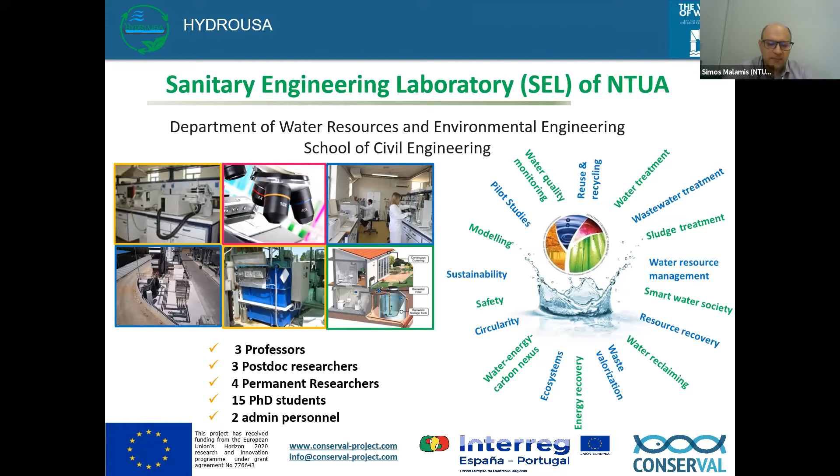I will now go into the actual presentation, the HYDROUSA project, and I have a video to share with you. It's a 3.5-minute video of the project.

Imagine a future summer day on an island, one of the hottest summers this island has ever seen. But wait, there is an oasis ahead. How is this possible? Let's see where it all started back in 2018 with HYDROUSA, an innovation action project funded by the European Union with the ambition to create regenerative and nature-based water solutions.

We are a constellation of international partners consisting of universities, research institutions, companies, NGOs, water utilities and municipalities, and we are on a mission. Let's think for a moment: the Mediterranean region faces significant challenges - dry zones, places with high touristic activity during the summer, problematic farming practices, wasted water resources. In HYDROUSA, we revolutionize the water value chain by closing the loops, and the revolution is circular.

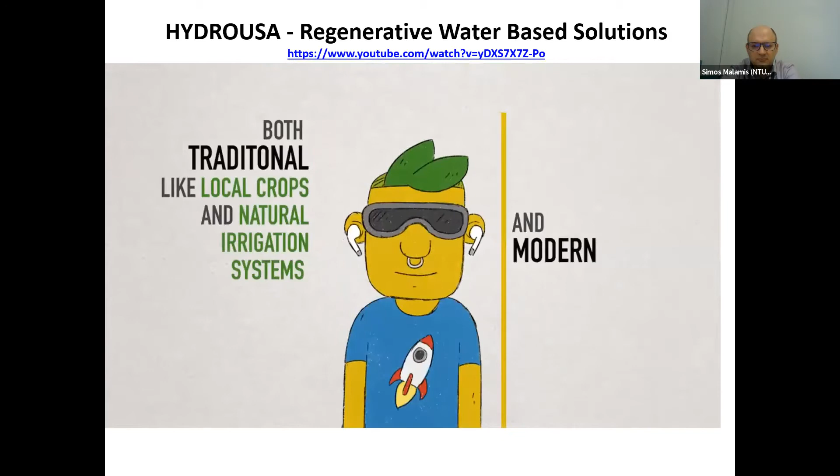We use a combination of techniques, both traditional like local crops and natural irrigation systems, and modern like ICT technology and online monitoring, mixed with biomimicry technologies - nature-inspired innovations. The journey of HYDROUSA has already started in 3 Mediterranean islands. Let's take a look at how they work.

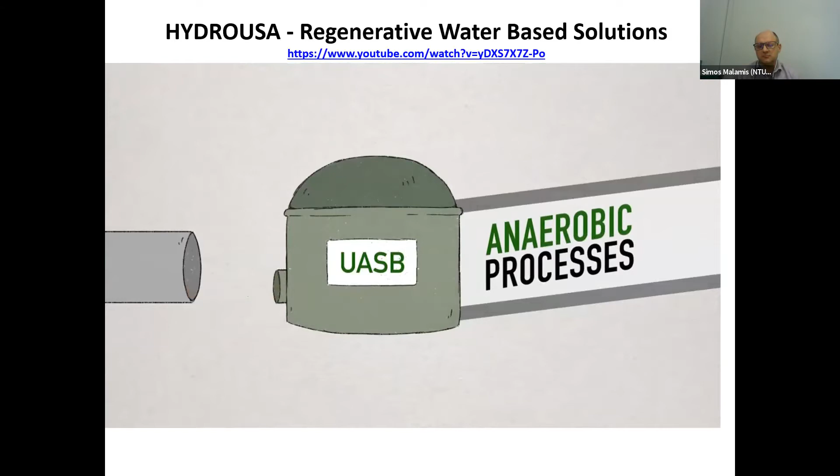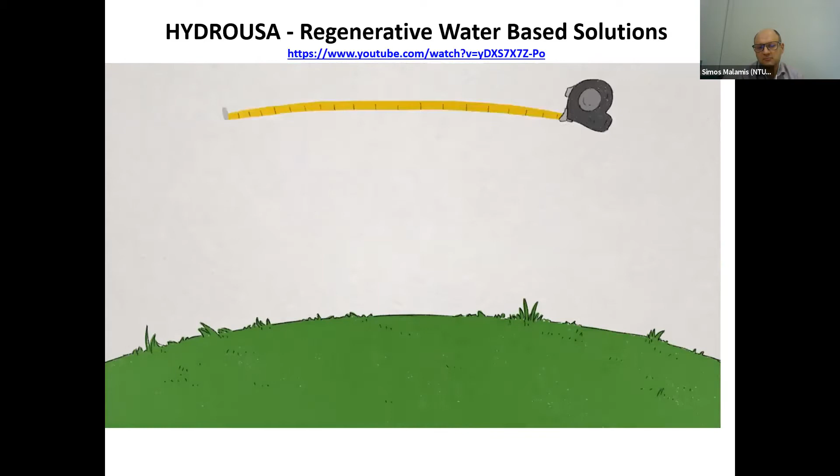On the island of Lesbos, we develop a rich agroforestry ecosystem. We treat domestic sewage by anaerobic processes coupled with constructed wetlands to produce biogas, which is upgraded to methane and used to fuel a car, sludge to be processed through an innovative compost cultivator, and treated water, free from pathogens, that will directly be used to fertigate and irrigate a 10,000 square meter field, including forestry trees, orchards, bushes and herbs.

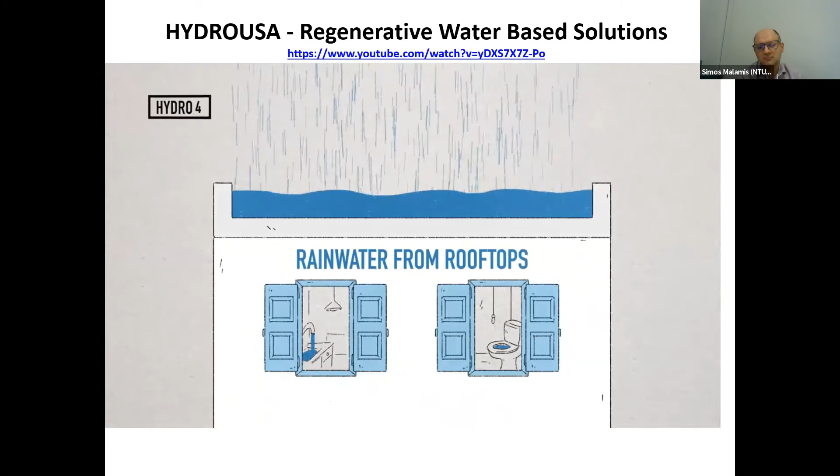On Mykonos Island, we install an innovative rainwater harvesting system on a remote dry hill to irrigate oregano and produce essential oils from it. Meanwhile, on the same island, we collect rainwater from the house rooftops to provide water for domestic use such as toilet flushing, and to recharge groundwater sources for the irrigation of a lavender field.

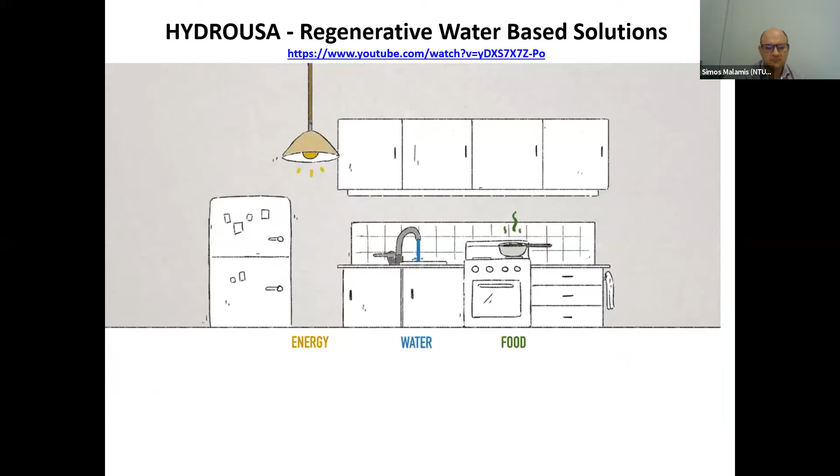Moving now to Tinos Island, we apply an innovative and nature-based desalination system that mimics the mangrove plants to produce edible salt and to irrigate a tropical fruit greenhouse. On a different site of the island, we upgrade an existing ecotourism facility with a combination of applications. The system aims to create self-sufficiency in terms of water, energy, and food production. All our systems are circular, creating holistic regenerative solutions that can be customized and integrated to local needs.

This is our journey for now, but 26 more islands and coastal areas are about to follow, from France and Egypt to Mexico and Australia. We are a community of water allies. We are closing water circles and we come with solutions. Join the circle.

Okay, so this was it. And regretfully, this was the most interesting part of the presentation. And now it will be my presentation, the least interesting part.

Our project is, as I mentioned, an Innovation Action Project. We have 6 demonstration sites, all in 3 Greek islands, as the video mentioned. And we are well within the 3rd year now of the project.

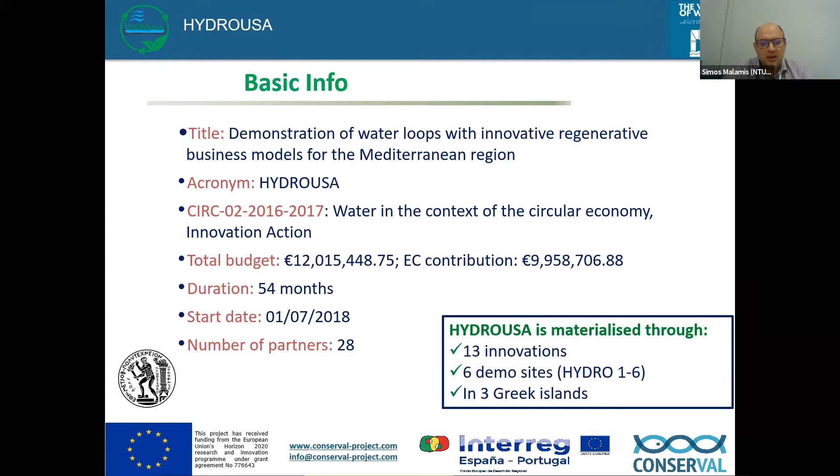We are a variety of 28 partners, and if I were to show you the project in one picture, this is it. This summarizes, in a sense, the HYDROUSA water loops. We tackle Mediterranean water scarcity issues by integrating other engineered approaches together with nature-based and nature-inspired solutions.

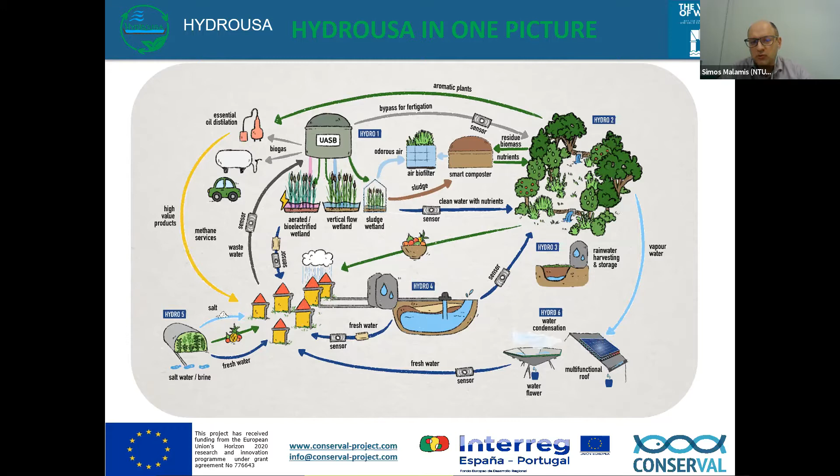So we have wastewater cycles with anaerobic processes together with constructed wetlands. We deal with rainwater harvesting and seawater in order to have a low-cost treatment solution. And all our systems try to be circular, meaning that there is a strong

interconnection with agricultural activities, but also non-domestic, domestic non-potable water use. So just to describe a bit more what we are doing in each demonstration case, because it was only briefly mentioned by the video, in Lesbos Island.

Lesbos is an island located in the very east of Greece. It's very close to the Turkish borders. And there we have the upflow anaerobic sludge blanket coupled with a 2-stage vertical flow constructed wetland, plus a filtration and disinfection unit. This treatment train produces reclaimed water that is rich in nutrients, but doesn't have the pollutants, organic carbon, or solids.

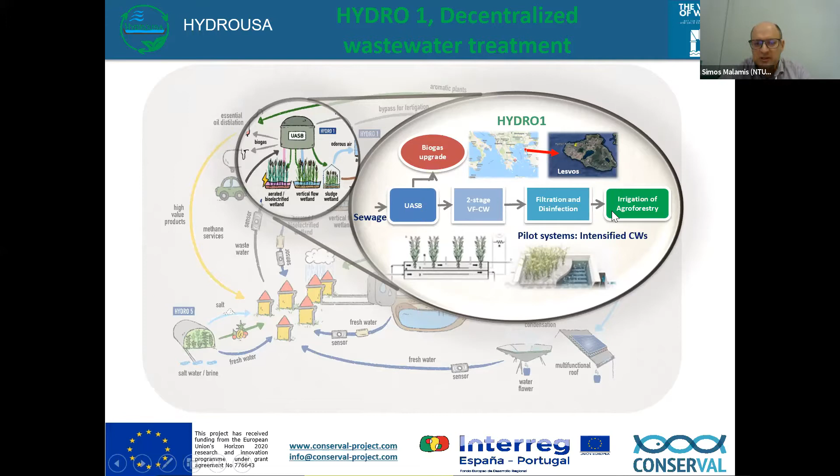So we are able to achieve the limits of unrestricted irrigation. This is the scheme you can see with the anaerobic processes, the saturated and unsaturated constructed wetlands, together with the membrane filtration and disinfection. We aim to achieve the limits required by Greek national law by actually bypassing the ultrafiltration unit so that we can reduce the cost.

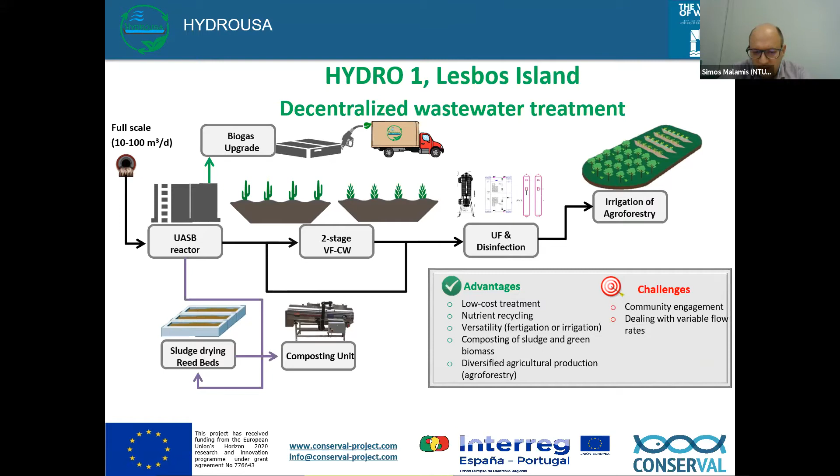We also have a sludge treatment wetland for the anaerobic biomass that is produced, coupled with a composting unit. The system has versatility in order to boost its exploitation potential and also have a good business case, since the agroforestry combination of trees together with crops and shrubs provides an increased benefit for the farmers.

Here you can see some pictures. The site has been running now for a couple of months, and you can see here it's two parallel anaerobic reactors, total volume of 40 cubic meters, together on the back with the gas holder tank, and on the bottom you see the constructed wetlands, which are actually biodiverse.

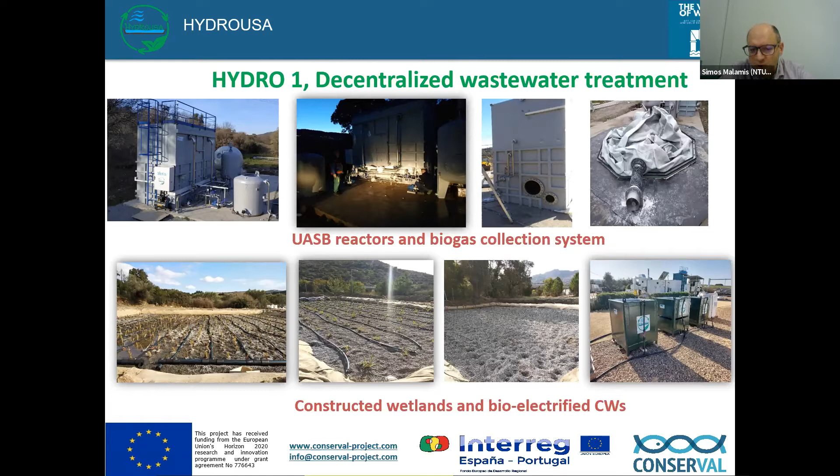We have 6 different species of biodiverse constructed wetlands, and together with those we are also testing the bioelectrified constructed wetlands, which are much more compact and can also produce some electricity.

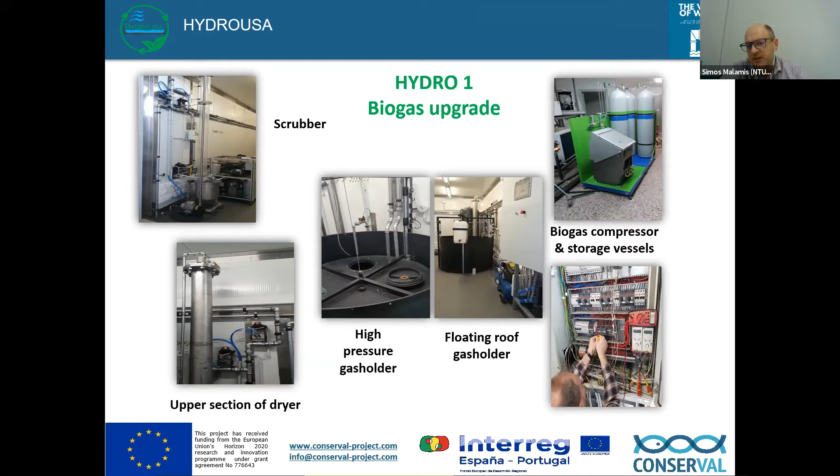Biogas is upgraded to methane using a chemical scrubbing process and recovery of the chemical to be reused again. The idea is to compress and remove the carbon dioxide and produce pure methane that can then be compressed and be used as a fuel.

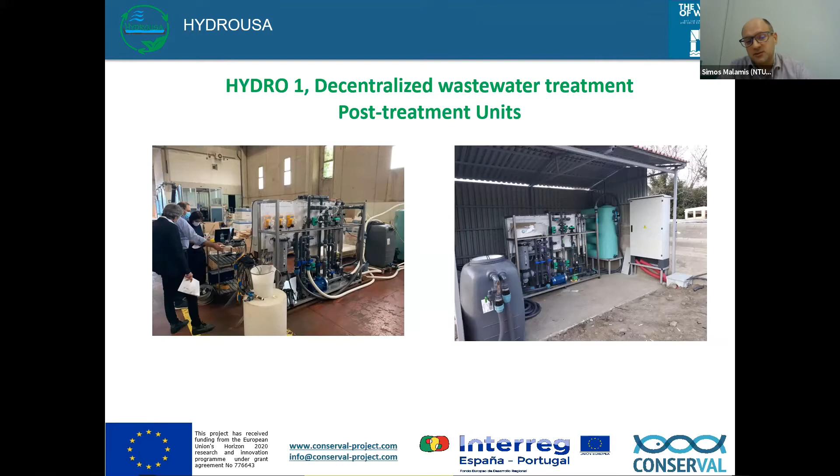The demonstration site 2 is actually adjacent to demonstration site 1, since it uses the reclaimed water that is produced from the wastewater treatment facility to irrigate. It consists of 1 hectare of land where we have developed a variety of species, including trees, bushes, and crops.

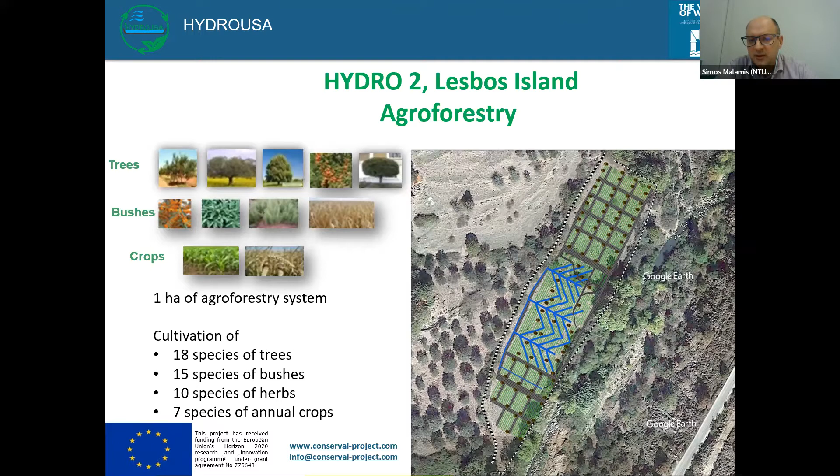This is actually, you can see here this field. It used to be barren land, and it's now being cultivated with a variety of crops.

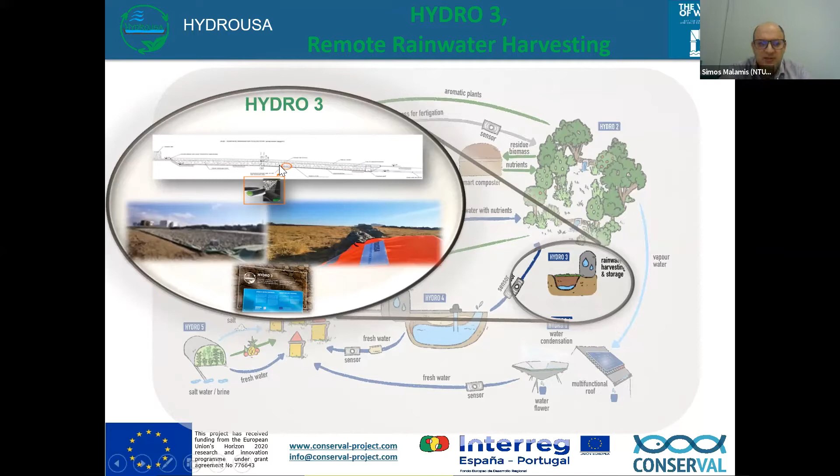The demonstrator 3 is a remote rainwater harvesting system that can be used for agricultural irrigation. So imagine a place where there is no roof, no house, to valorize rainwater. So what has been done, the consortium has developed a subsurface rainwater collection system, and this is, you can see here,

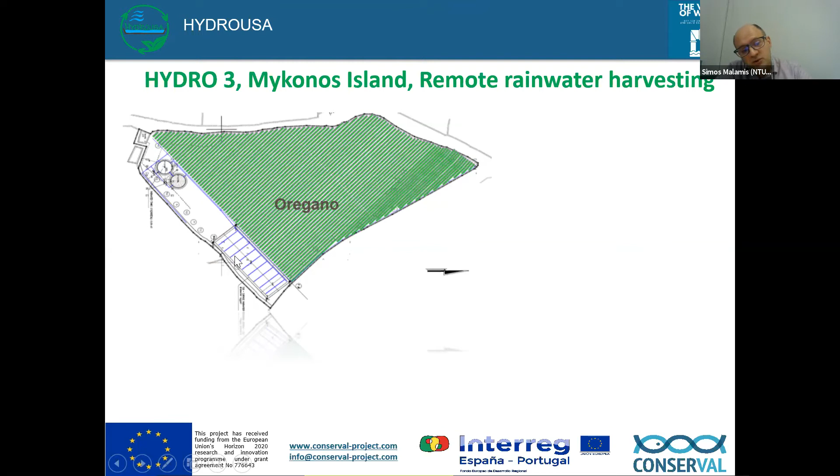the field is 4,000 square meters of oregano, and on the top left is the water storage system, and on the bottom is the collection system.

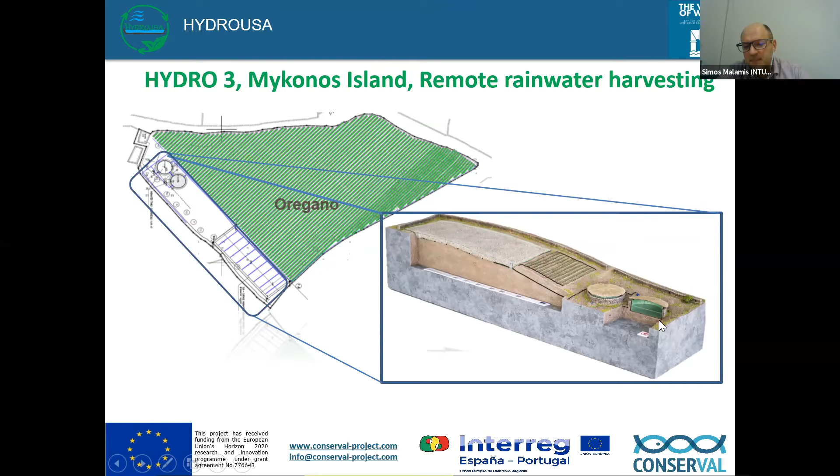We've actually produced a 3D model, a real model of the system that you can see here with the collection system and the storage system and the cultivation.

Again, here you can see some pictures of this model, and the final aim is to produce, through this circular use of water, essential oil that has a high market value to be valorized locally.

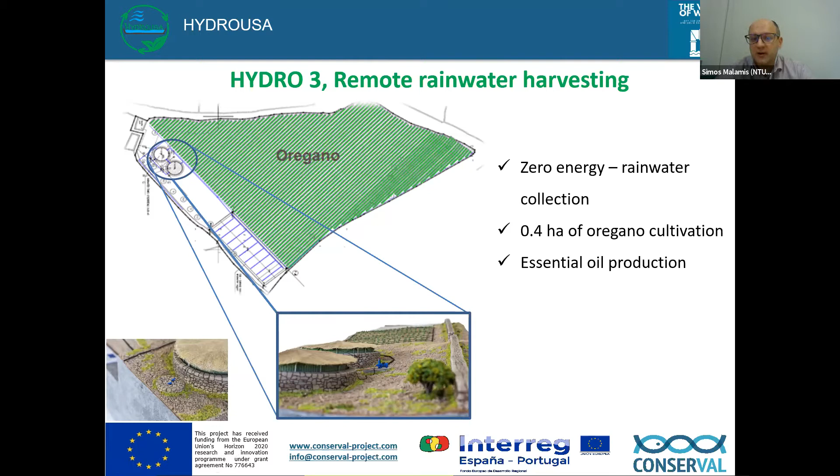These are some pictures of the construction system. These are the tanks here. This is the irrigation system. It's been running for more than a year now, and we have been able to reach our KPIs, key performance indicators, in terms of water collected and quality, which is currently under assessment.

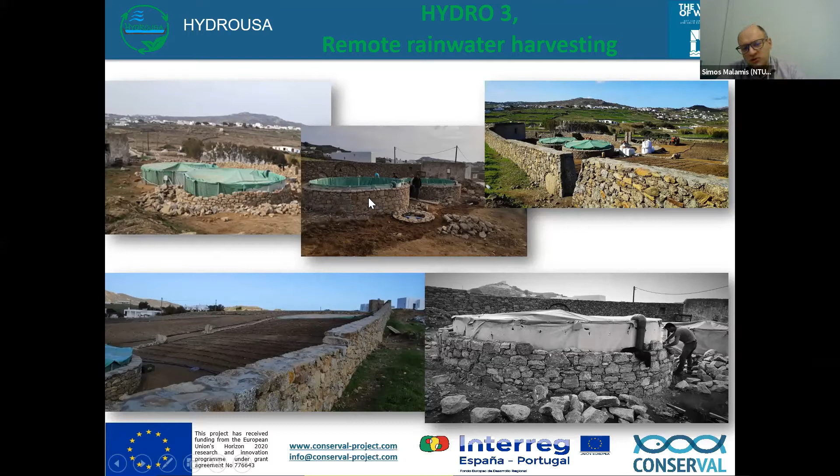What I want to mention is that in all of the HYDROUSA systems, we try to harmonize as much as possible with the natural landscape. So you see that all the geomembranes for the tank are covered by stone, which is traditional to the place where it has been installed, in Mykonos Island.

Again, here you see this is a reconstruction of the lodge, where we aim to put a system for the extraction of the essential oils, to be used as a demonstration system. We also have a low-cost monitoring system in place for the meteorological data, for the water quality data, and even for the flow meters.

And all of this is autonomously powered. We're talking about a decentralized scheme. So it is powered by photovoltaic systems.

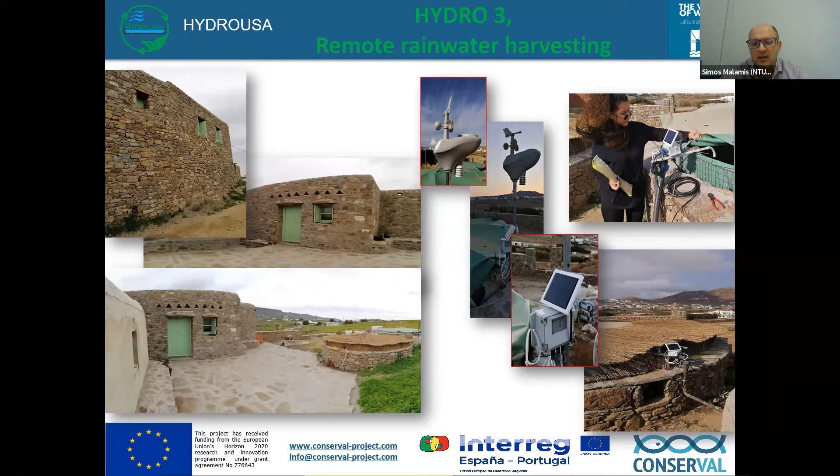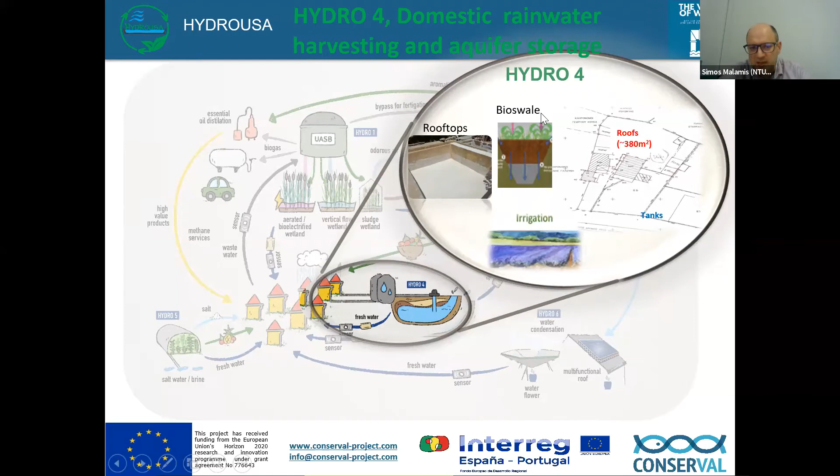The demonstrator number 4, Hydro 4, is a domestic rainwater harvesting and aquifer storage system. We have roofs here to collect rainwater, but we also collect stormwater and urban runoff using the nature-based approach of bioswales. So we have basically 3 systems integrating in a domestic residence.

In Mykonos Island, we have a residential rainwater harvesting system. We have a slow sand filtration process for rainwater treatment, coupled with disinfection, to see if we are able to get the water standards up to drinking water quality, which is quite difficult, I would say.

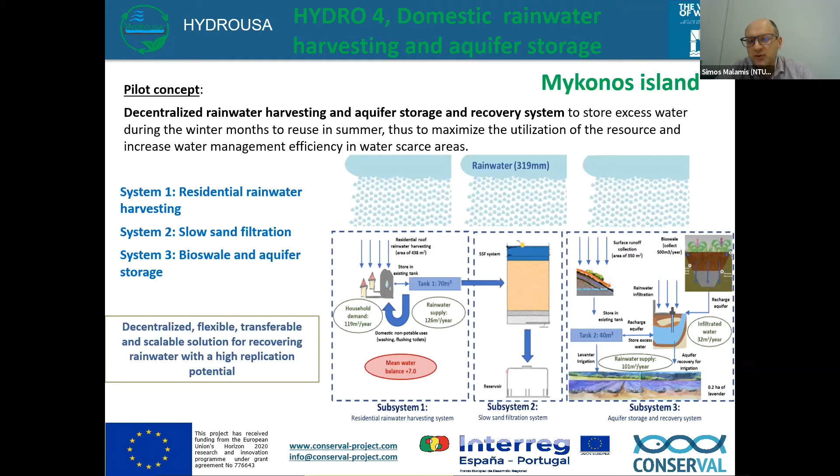And then we also have the bioswale system. Here, for the storage of rainwater, stormwater, and surface runoff, we use a combination of tanks, but also aquifer storage. So we store the water into the aquifer during the rain season and use it during the dry season. These are some pictures of the construction.

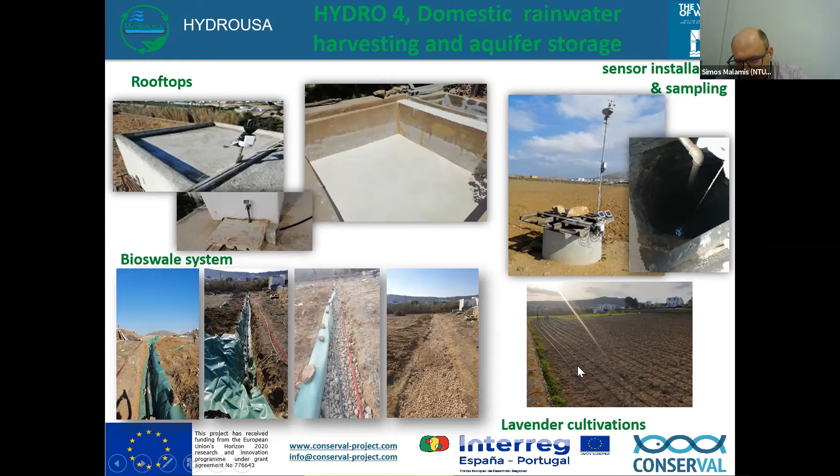And this is the cultivation of lavender. Actually, the lavender is here, but it's very, very small at the moment, so you can't really see it.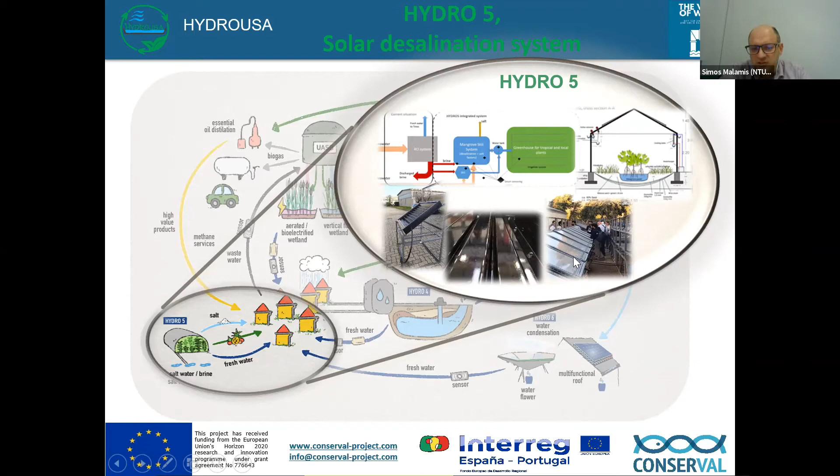Moving on to the Tinos Island demonstration sites, there we have Hydro 5, which is basically low-cost seawater desalination by solar practices. The seawater is put into these solar panels, where due to the high temperature it evaporates and then condensates. It is an innovation by our partner Planet, and is able to desalinate both seawater and brine, producing water and also edible salt.

And we feed the water at the moment. This here is the seawater that is fed into the mangrove still systems. Mangrove, because of the plant mangrove that is able to resist the salt. It's a nature-inspired approach. And then into the production greenhouse, where we cultivate tropical fruits.

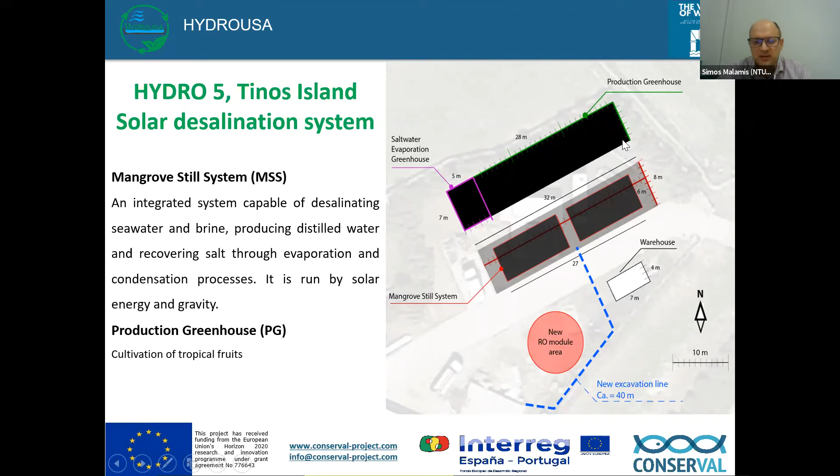You can see here the actual system implementation, which has been running a few months now. And also part of the greenhouse is ready with different types of tropical fruits.

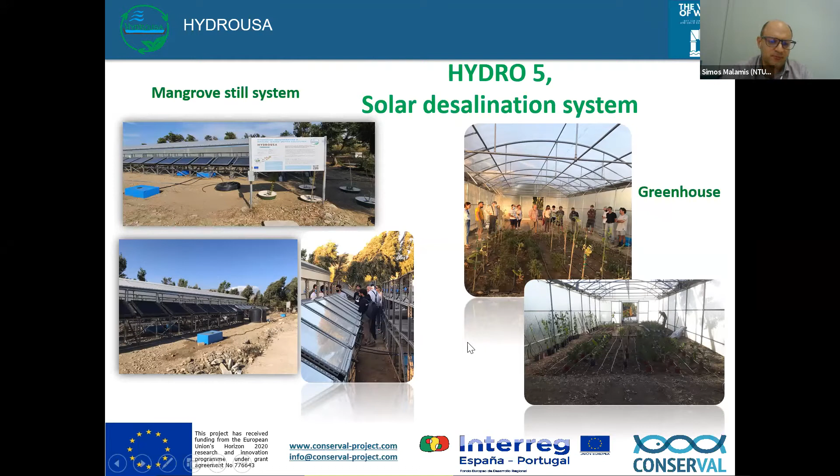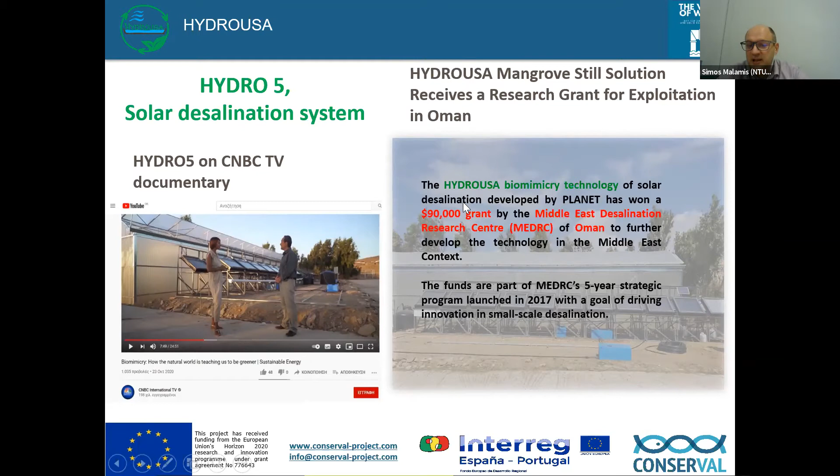We had the honor that the system there was actually visited by a CNBC biomimicry documentary. They flew from the US to Tinos Island and made a 7 to 8 minute film of the technology. Plus, the technology has also received a grant for application in Oman.

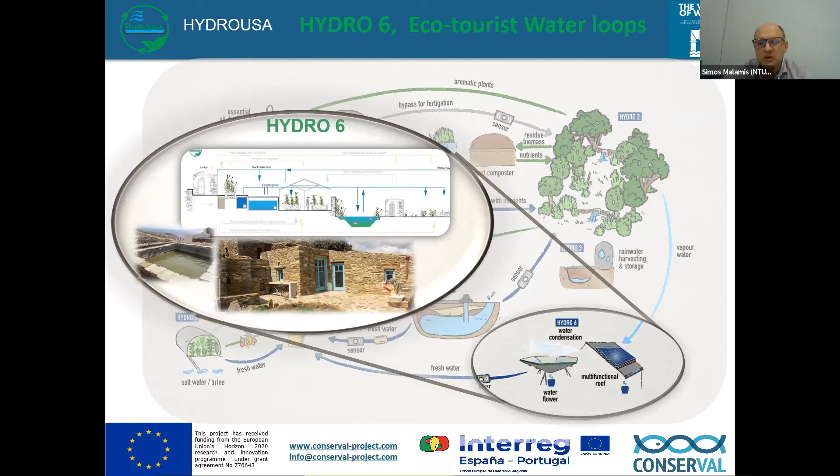The last technology is basically developing very small water loops in an ecotourist facility in Tinos Island. So there we have different kinds of water — rainwater, sewage, even vapor water loops — where everything is valorized. The Tinos Ecolodge is a touristic facility that is off-grid, meaning it covers all of its energy requirements through photovoltaic panels. Also, the reserves of water are low, so they want to valorize all types of non-conventional water sources.

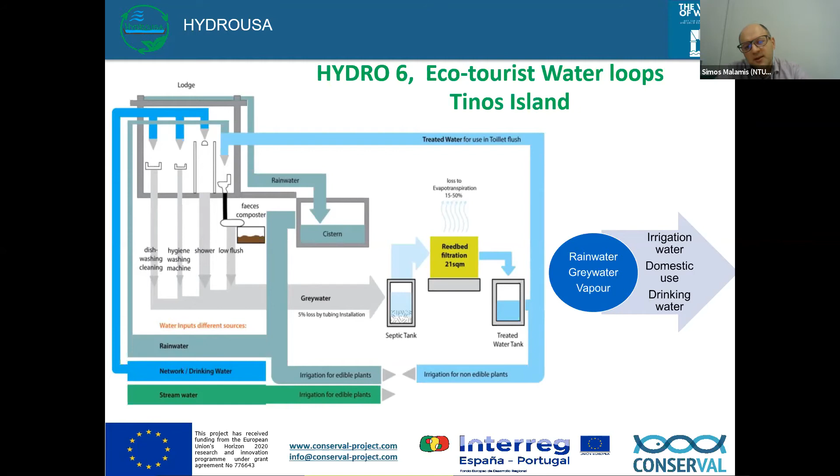So we're talking about rainwater that is used for toilet flushing. We have wastewater or grey water that is treated by the reed bed and then disinfected to be used again for some cultivations, and even vapor water that is used for more high added value applications. We're even testing it for drinking water applications.

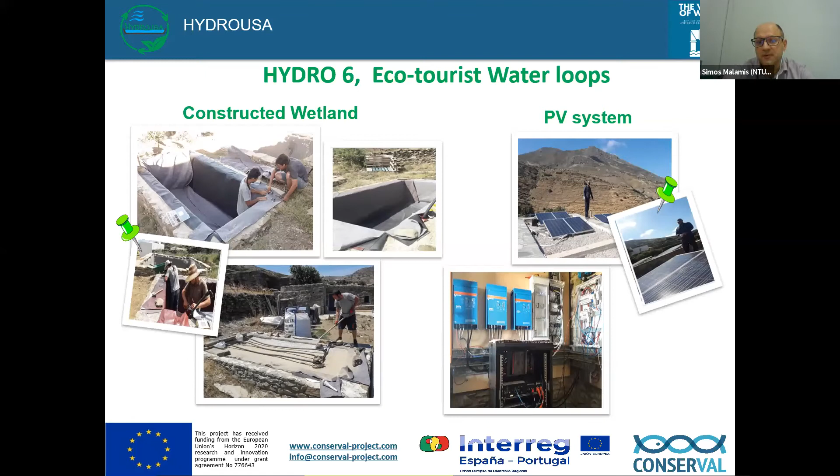These are some photos of the ecotourist lodge. You can see here the development of the wetlands. This is the system of the photovoltaics. They have a photovoltaic system for collection, but also batteries to store the power in order to use it during the night.

They have a very, very successful business case and circular approach because they are able to produce a variety of crops, and they actually use these crops for their residents. They have around 10 to 12 residents during the summer season, this is the capacity, and they are fed by the Ecolodge products. They also support local food and beverage facilities, mainly restaurants.

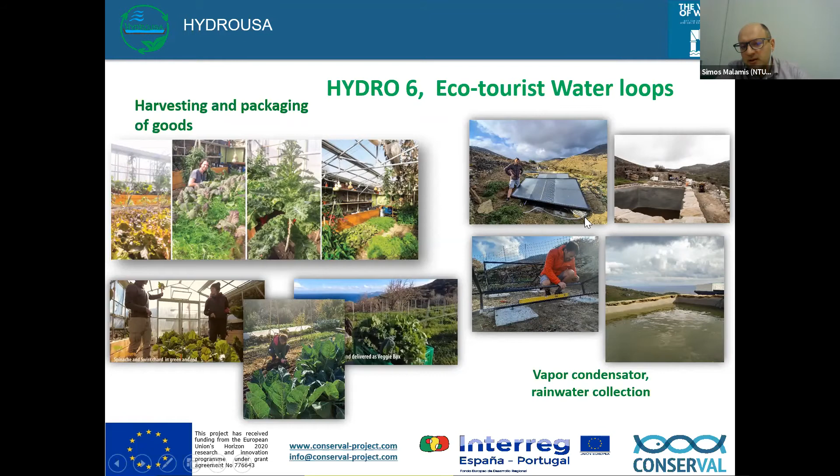We have an extensive monitoring system for all the hydros. It is not easy to work in these systems because they are very remote. The closest application, the Lesbos case, where there is a lab to do analysis, is a 1.5 hour drive. And some of them, in the whole vicinity of the island, there is no facility.

So we rely a lot on online monitoring activities to support our case study. And of course, we couple this with lab analysis in order to confirm, but also to do some more analysis that is required, for example, for inorganic or organic micropollutants.

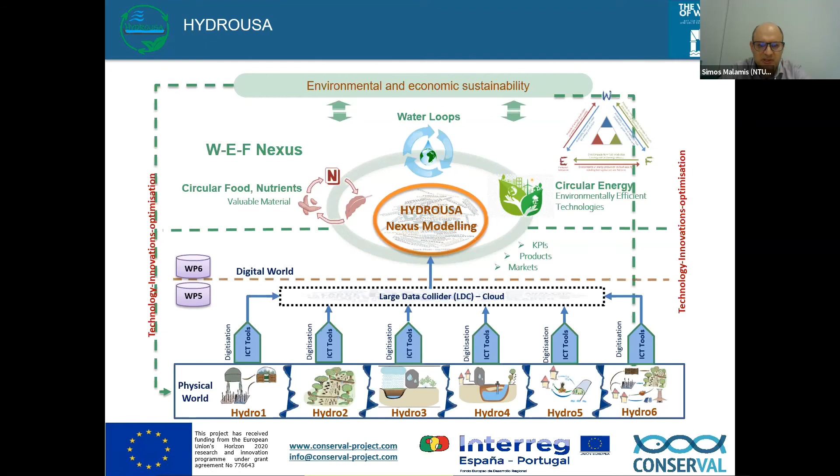We'll be developing a nexus model within HYDROUSA based on all the data currently fed to our system. Another thing that I think is important and worth highlighting, made by the Brunel University team, is that within the project we have developed a multi-sectoral water circularity assessment tool that considers the water, energy, food, and industry — in this case agriculture — nexus.

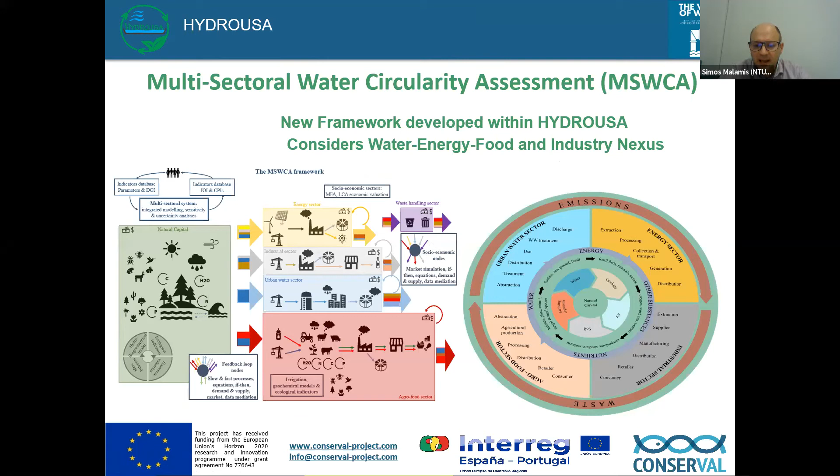And this tool has found a very big impact within the water industry. It is currently being used by very big water companies, like Jacobs, in the tendering procedure to apply for water tenders.

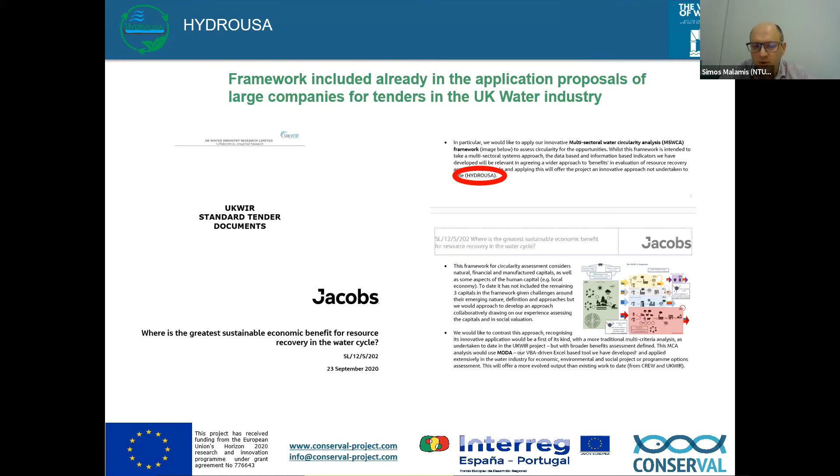What HYDROUSA wants to demonstrate is that there is a business case in small water systems. Small water systems are often criticized for being cost inefficient, and it is true. If you compare a small system, either water treatment or wastewater treatment, with a large one, there is no economy of scale in the small systems.

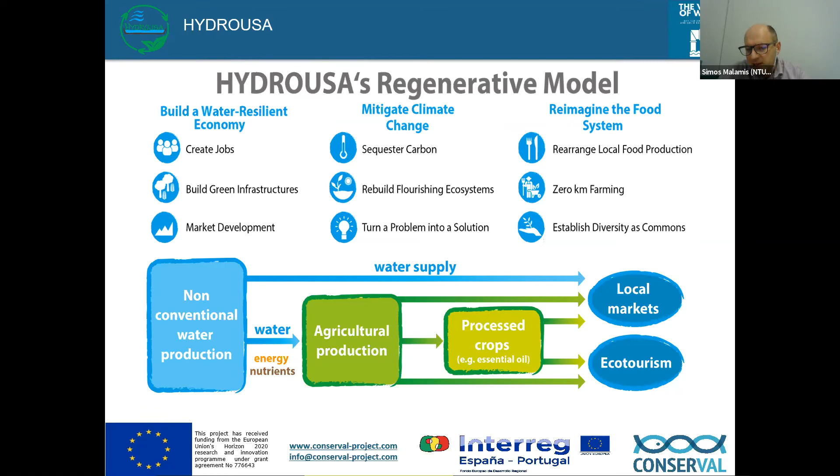But in HYDROUSA, what we want to demonstrate is that through the cascading effect of integrating the water cycle with the end products - meaning agricultural products, salt, energy - you can have a lower payback period, and this can make a business case. The aim is to valorize resources for the local stakeholders: local water utilities, municipalities, tourist businesses, farmers.

Although the pilot systems are all located in Greece, because the idea is to develop a circular island, we have more than 25 replication and transferability case studies all over the world. And also we have some very real interest from a couple of sites that are interested to develop HYDROUSA solutions in their case.

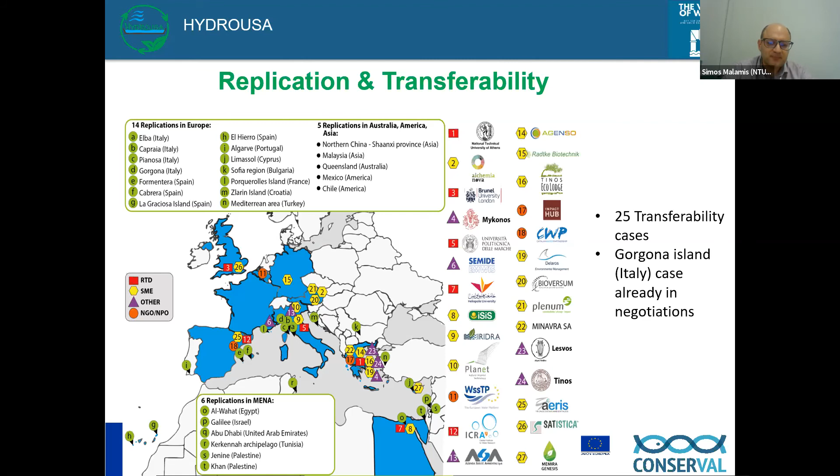Some ideas and numbers about the HYDROUSA dissemination and communication activities. We have been impacted by COVID, so we had more events before the COVID effect, but we're still quite active. We are approaching 300 dissemination activities in the 32, 33 months of project operation. It's a very good number, I think, and we have several thousand followers on social media - LinkedIn, Twitter, and Facebook.

A strong element of HYDROUSA is the co-creation part. During the early stages of the project, we did co-creation workshops on the 3 islands, and we tried to involve the local population in shaping our solutions. I'll give a couple of examples.

In the first 8 months of the project, we did an ethnobotanical study of the different species we could cultivate in the agroforestry system. More than 60% of the actual species planted in the agroforestry system were suggested by the local population. They know the local microclimate very well, and all generations have the wisdom to support what can be planted and what not.

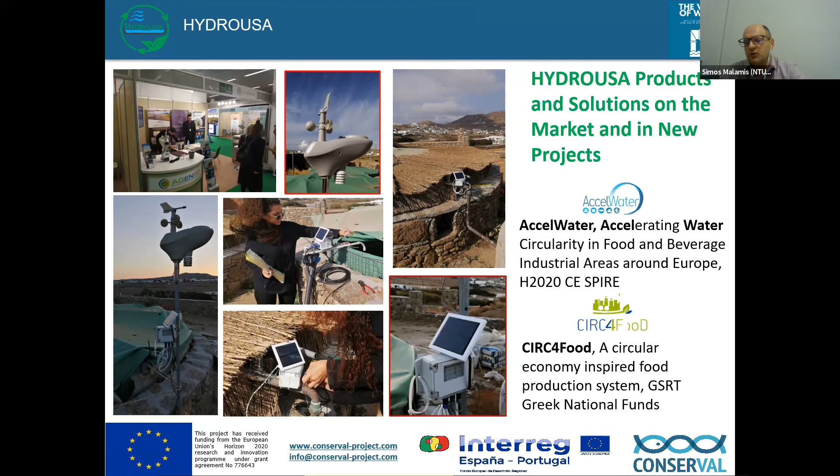And we also have a national project where we are implementing urban farming activities and the rainwater solutions of HYDROUSA, in order to have these kinds of activities in a municipality.